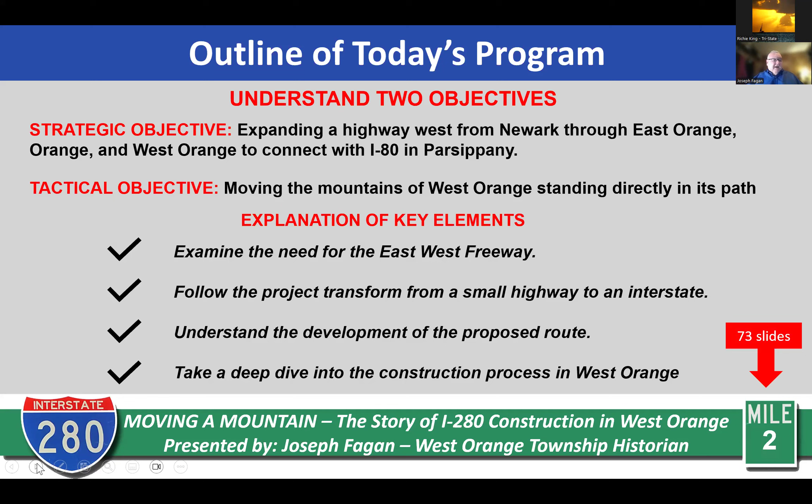So tonight I'd like to explore these key elements: examine the need for the east-west freeway, follow the project as it transformed from a very small highway to an actual interstate, understand what transpired in the development of the proposed route, and take a deep dive into the construction process in West Orange itself. There are 73 slides, which you can see in the lower right-hand corner. I have it marked like a mile marker, so you can see where we are in terms of progress.

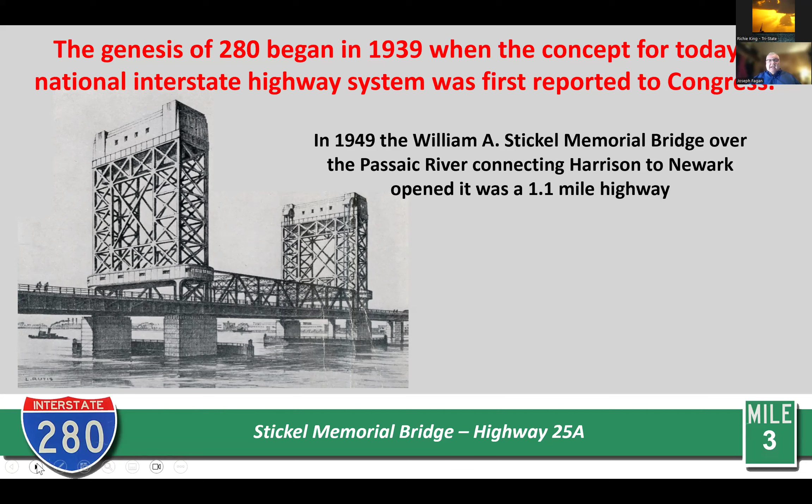The genesis of 280 - the concept for today's National Interstate Highway System - was actually first reported to Congress in 1939. Then in 1949, a landmark I'm sure you're all familiar with, the William A. Stickel Bridge, was built over the Passaic River connecting Harrison to Newark, and it opened as a 1.1 mile highway. It's hard to really think of 1.1 miles as a highway, but that's how it began. It was classified as New Jersey 25A. William A. Stickel, by the way, was an engineer, a county engineer for Essex County.

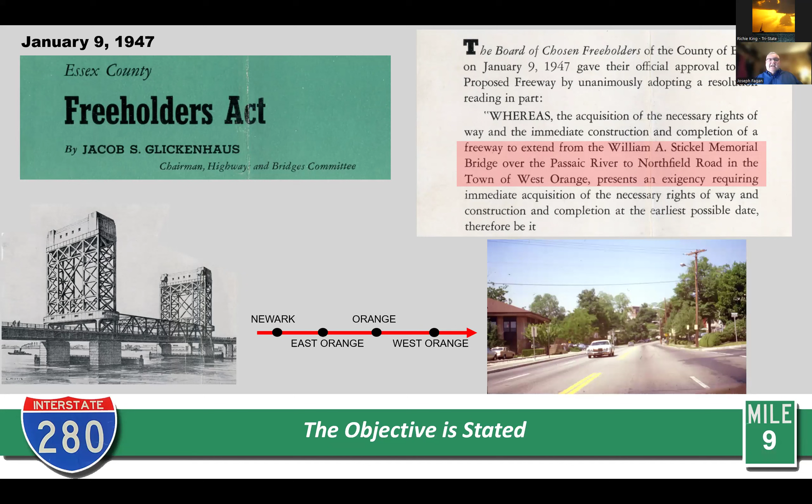So it was looking to go from Newark, East Orange, Orange, West Orange. That was the proposed route, and it was going to end at Northfield Road in West Orange. That's a picture of Northfield Road there on the right side.

It started as Highway 25A, as I had mentioned. Then in 1953, it was renamed New Jersey Route 58 under the old highway numbering system. And it eventually, in 1956, President Eisenhower provided funding to build an interstate highway system.

It might be worth mentioning that President Eisenhower, before he was president, was General Eisenhower, Supreme Commander during World War II. Eisenhower had brought home with him from Europe the concept of an interstate highway system because he saw how beneficial it could be in Germany. He saw how the Germans had built the Autobahn system, and Eisenhower felt it was important for us to have a similar system here in the United States.

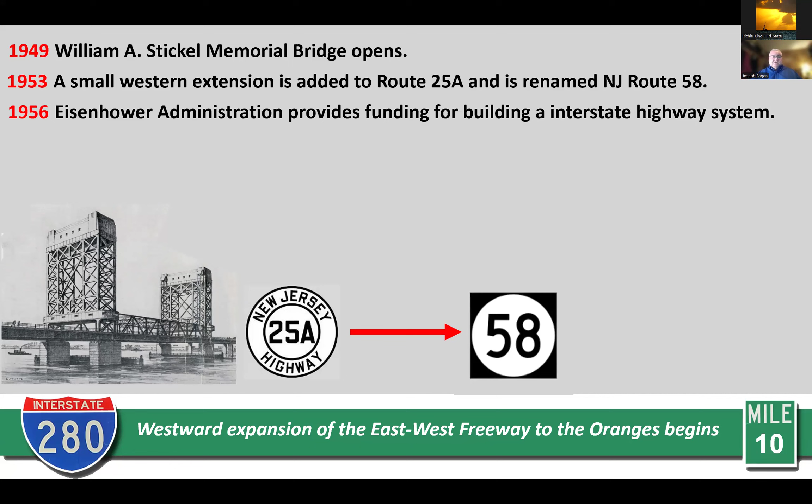In 1957, it officially received the designation of I-280, but there were no route designations as of yet. You could say 1957 is when 280 was born.

And of course, it was always interesting that it actually took you to Route 80. As a kid growing up, we always thought that was cool, because that's why it was named 280. When in reality, any connecting highway to a major highway, and there's plenty of examples around the country, is usually a 3-digit designation.

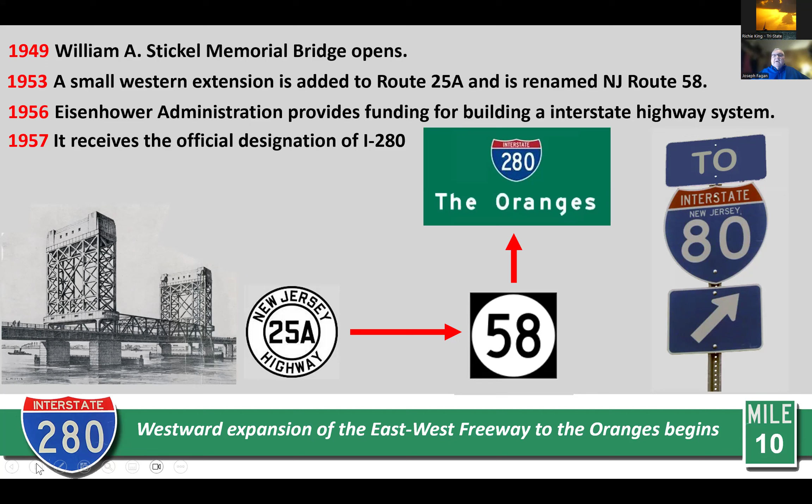It's not advancing here. Oh, I'm sorry. Bear with me a moment.

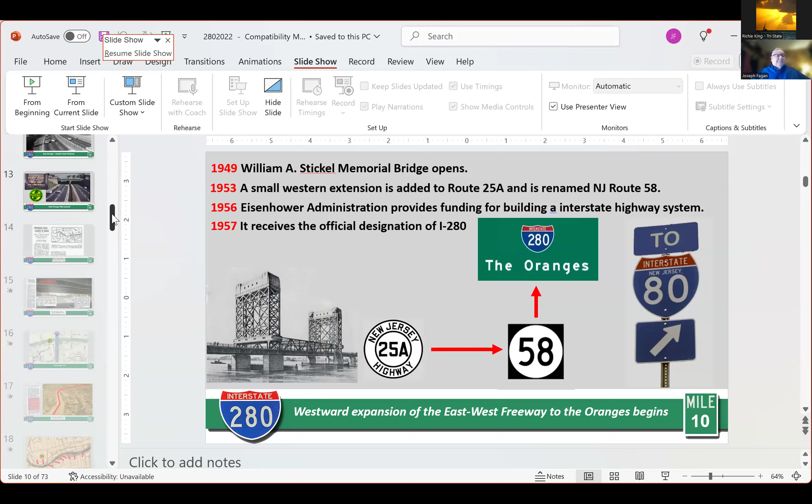So the biggest takeaway of these first obstacles was that a freeway will not be free, that there were going to be many costs associated with it. Of course, costs were anticipated, but the battle began as to where the highway would go, below grade or above grade.

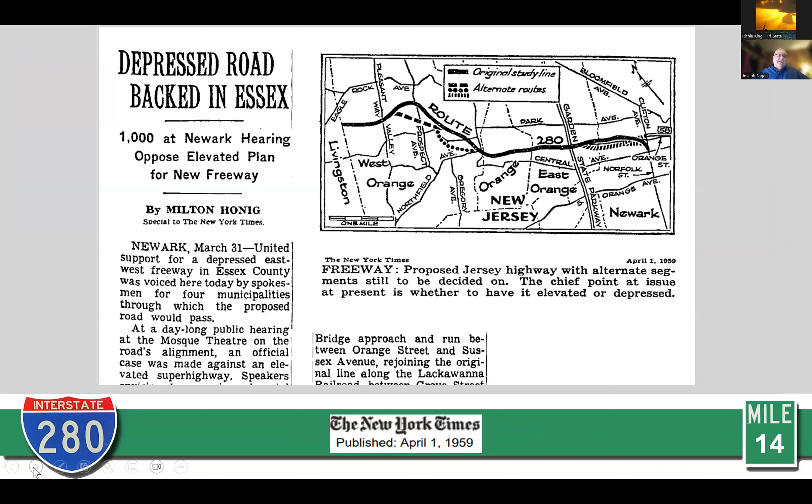Another article from the New York Times, 1959, talked about people turning out in opposition of an elevated plan for the new freeway. It was ultimately decided and reported in 1961 that the proposed east-west freeway would bisect Essex County, but it would pass under the Garden State Parkway. So the battle was kind of won for a depressed roadway. And it was only at that point a 7.3-mile long freeway, which received its designation for 280 in 1957.

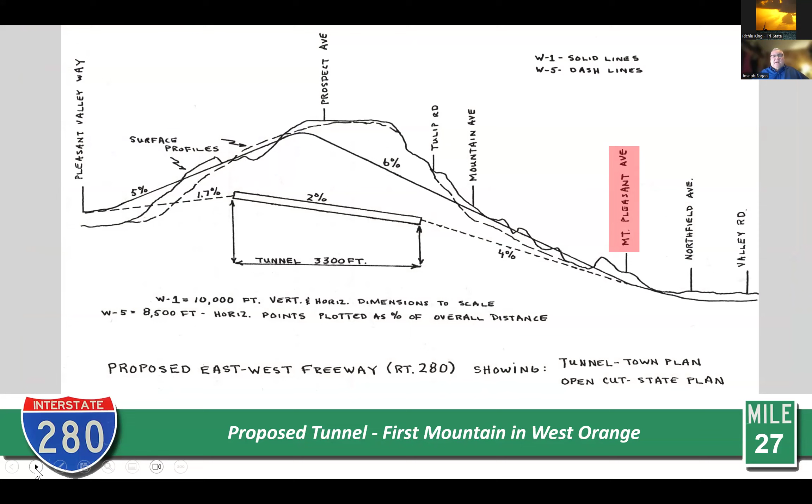This profile shows the 6% grade as opposed to -- that's Mount Pleasant Avenue, that's Pleasant Valley Way -- this is what West Orange Mayor Sheeran wanted. He wanted a tunnel through the mountain, and it would have only been a 2% grade, which would have been much safer. Mayor Sheeran was a veteran, a decorated veteran, I should note, of World War II.

Mayor Sheeran was actually very visionary in his concept for a tunnel through the mountain because he believed that West Orange could retain the land above the tunnel for taxable purposes, taxable ratables. He also believed the tunnel could be used as an emergency shelter if needed during the height of the Cold War. Of course, the tunnel concept was deemed too expensive, and the yellow line indicates the 6% grade, and that was how it was built.

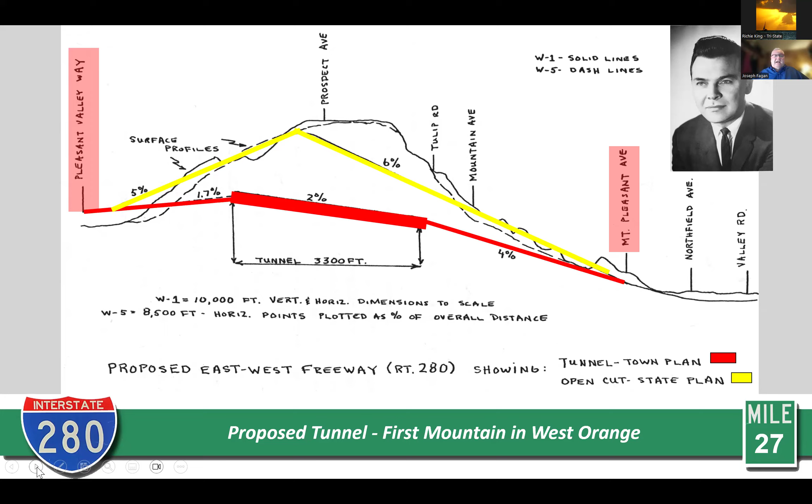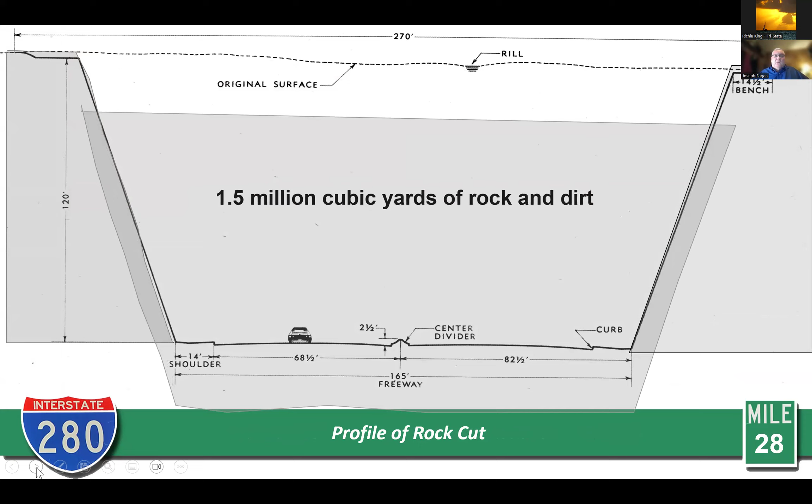This is a profile looking at the deep rock cut, and there was 1.5 million cubic yards of road, rock and dirt in the way, and that all had to come out. So that was one of the engineering feats that remained in front of the construction.

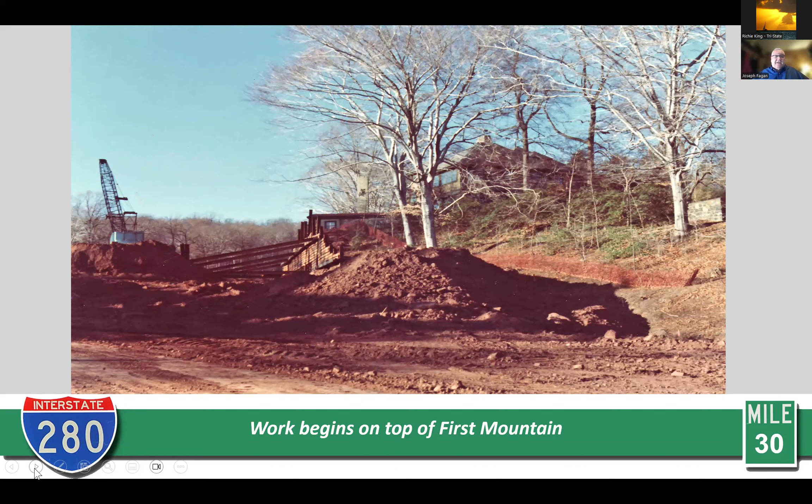When construction began on the top of the first mountain, they used -- well, first it was just digging by conventional means, just moving dirt around. This is, I believe, a house on Llewellyn Park that's now on top of the hill there. But it really wasn't so much affected by the construction.

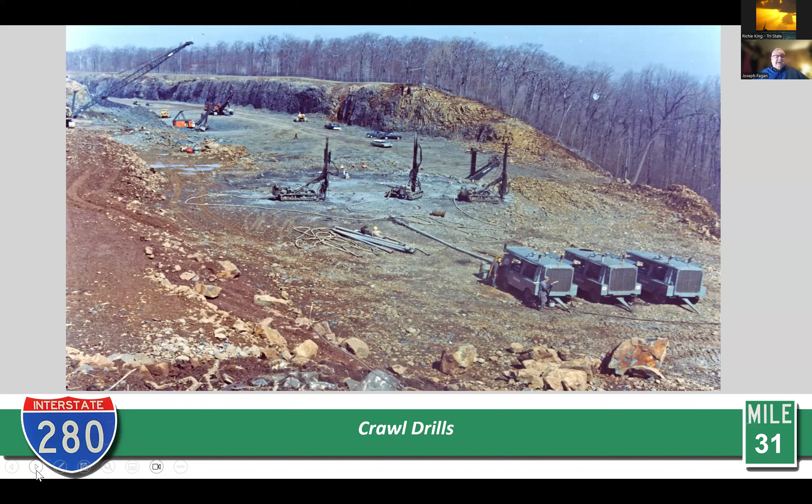But as construction progressed, the company used Ingersoll Rand, what was called crawl drills. These basically were drills that could be maneuvered into place. You can see the air compressors to the right side, and they were powered by the air compressors, and they would dig down.

There were 10 crawl drills, and they could produce 4,000 yards of rock a day with no delays. Now, of course, this was a sales pitch, but I'm sure there was some truth to that, and it helped keep on schedule.

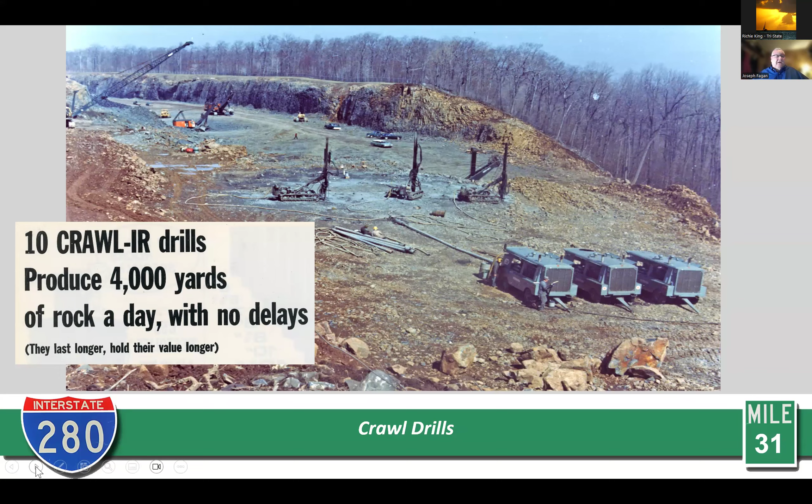Here you can see a picture of the crawl drills in action, and this was an ad that appeared in a trade journal from Ingersoll Rand. Of course, they used the 280 construction as a selling point for the crawl drills.

If you drive along 280 today -- don't take your eyes off the road, the road is dangerous enough -- but if you're a passenger in a vehicle, you can still see some of these marks in the rock. These were the result of the crawl drills drilling down into the rock to put explosives in there to remove the rock.

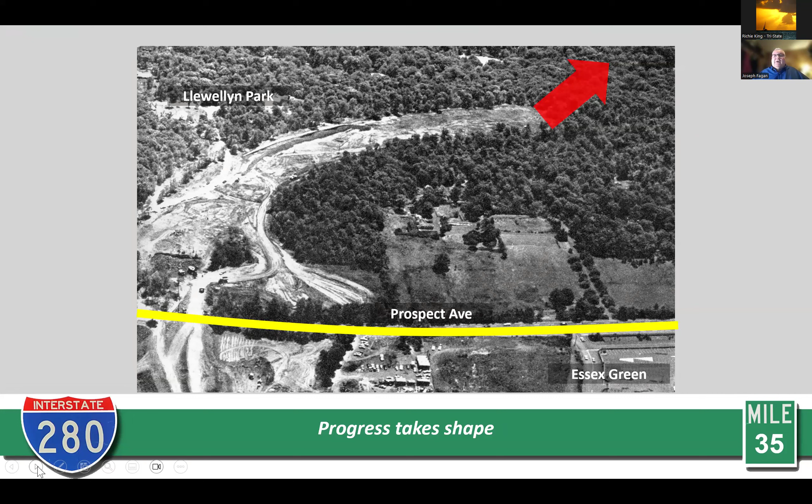Here you can see an aerial view of progress taking shape. Trees have been removed, the highway is starting to take form. This is Prospect Avenue in West Orange, so we're looking east. Essex Green, if you're familiar with the area, is in the lower right-hand corner. The red arrow indicates the direction it's going, towards Orange, East Orange, Newark.

This is on Prospect Avenue in West Orange. I actually remember this, traveling on Prospect Avenue as a young boy with my family and seeing all this construction and just wondering what the heck is going on.

One of the problems confronted by the engineers was in Morris County, there were low-lying areas, and they needed to build up the roadway bed.

Now, some problems arose from this method. A completion deadline in 1971 was fast approaching. They had many delays with funding, but they wanted to abide by the schedule of getting this done quickly. But trucks could only run on a limited basis over the neighborhood streets, and there were high maintenance costs. I believe frequent tire replacements were part of the problem with running these trucks.

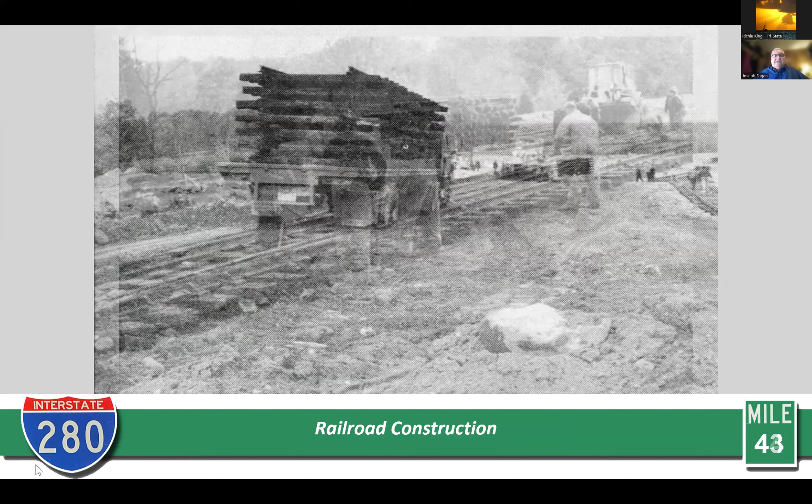So the construction of the railroad came very quickly. Here you can see, from the magazine article, the rail sections being brought to the site and being laid into position by workers.

These are just some random shots of the construction of the railroad. This shot here is looking west, near the Eisenhower Parkway interchange.

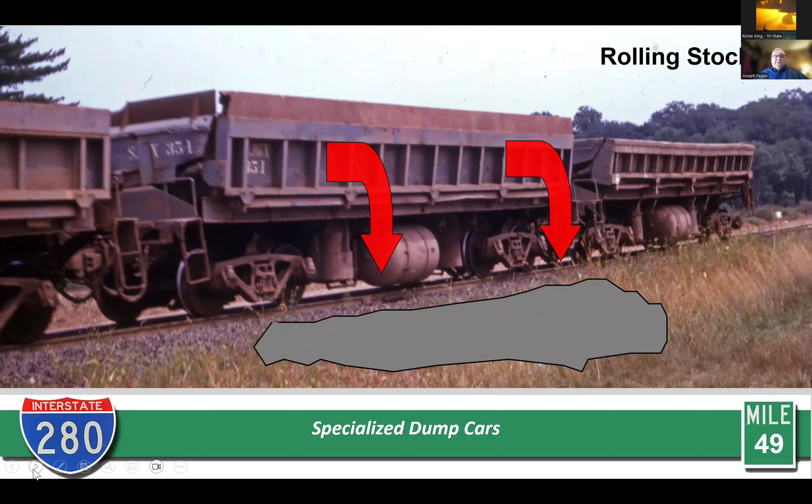The rail cars were specially designed rail cars where the load could be loaded in the top, and the side of the car would open. The door would swing open, and it could be dumped onto the ground. These were specialized dump cars, and in later years they got some more from Eagle-Picher. I believe this was a mine out west someplace where they got these cars on lease or purchased, and they reused them in the construction.

I also might point out that the trains were operated by S.J. Groves employees, not railroad engineers, and that also caused some fuss with the railroad because they wanted engineers, but S.J. Groves had nothing of that, and they used their own employees to operate.

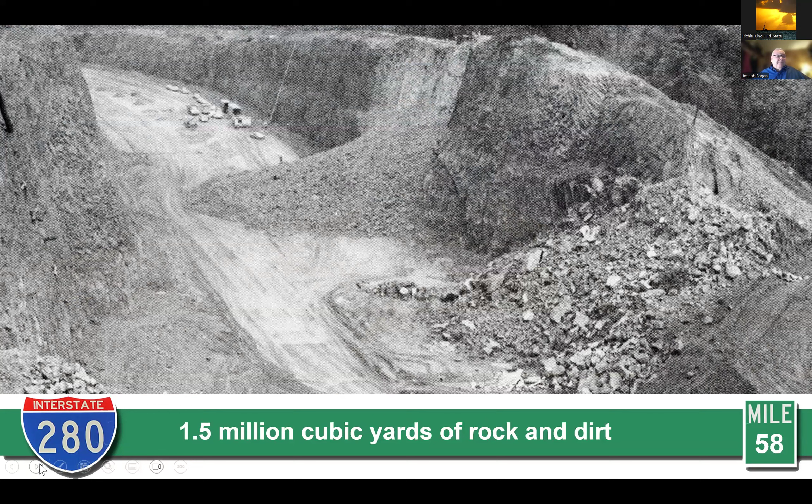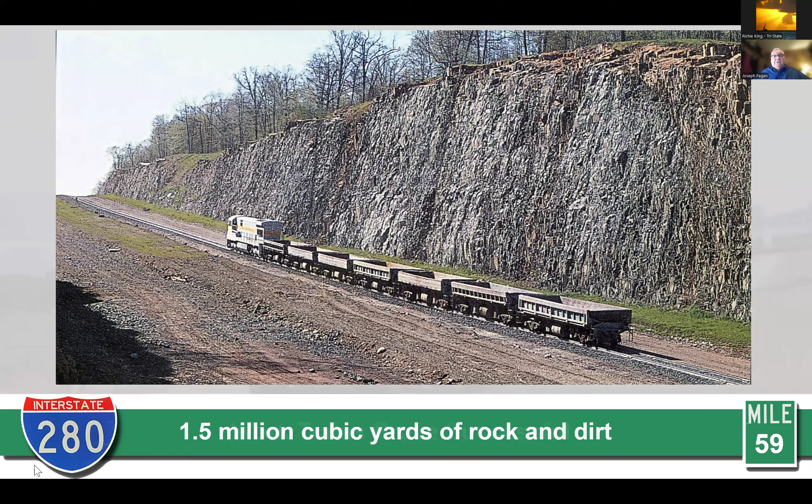This is the Laurel Avenue exit. You can see the overpass has been completed. And this is the Alco engine, which as I said was usually used to help the two General Electric units. It's one of my favorite pictures here—you can really see the highway starting to take shape, and the rock heading west towards Morris County.

This is just east of Prospect Avenue, a staging area. But looking east, you can see there's still a lot of work that needs to be done to get the highway down the mountain and through the Oranges.

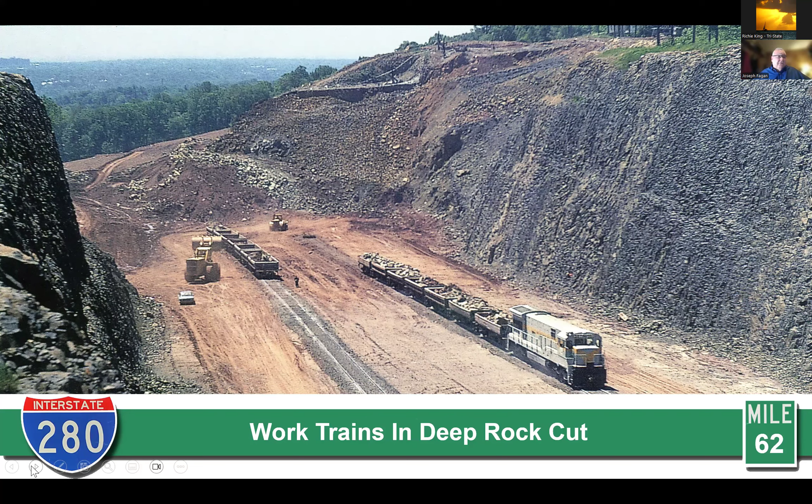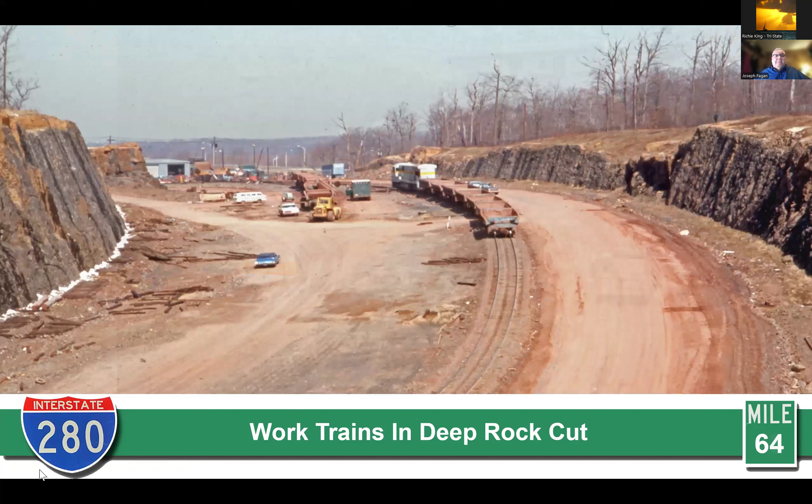This is a view of the Prospect Avenue overpass, where you get a better look at the special cars, the dump cars, of the train. Here's another picture in the Prospect Avenue area, as is this one.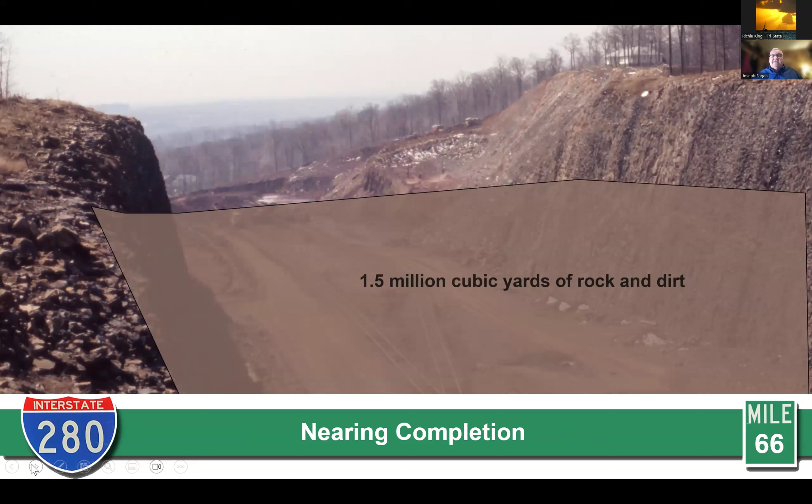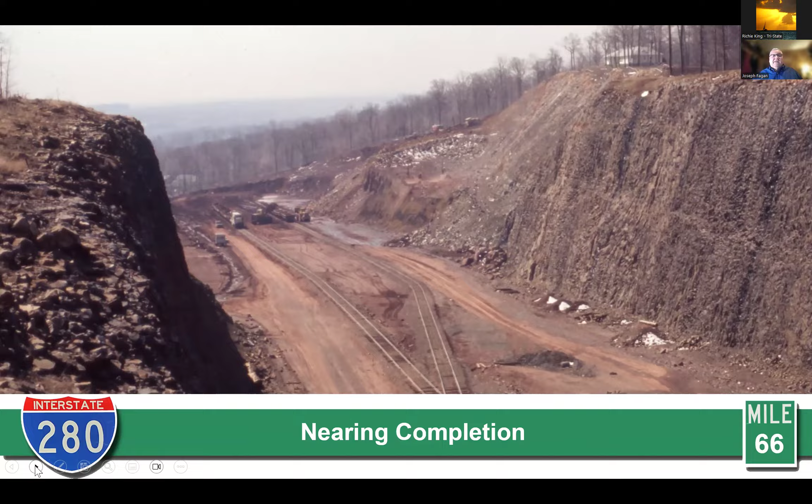As I mentioned, it was 1.5 million cubic yards of rock and dirt that had to come out of there, and just to make that disappear the way it did, it was all done by the temporary railroad. It started with trucks, but the trucks weren't going to work out for many reasons, so the railroad proved to be the most plausible, most reasonable means of getting it done.

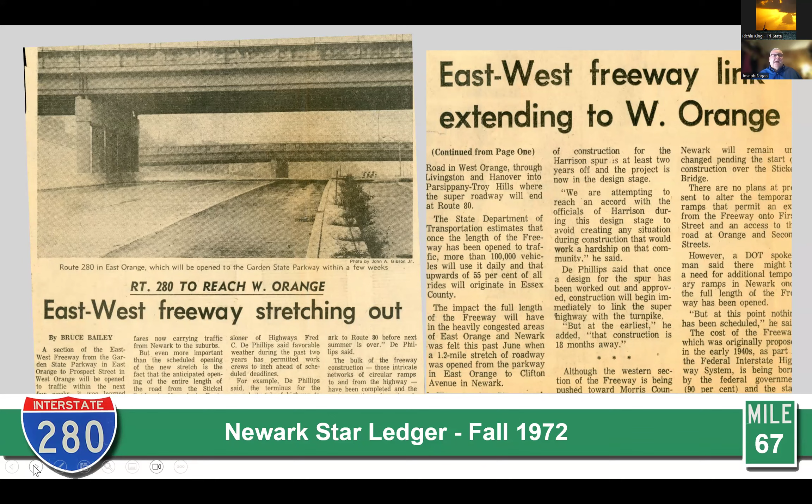By the fall of 1972, the Star Ledger reported that the East-West Freeway was under construction but actually nearly completed, though not yet open. Many people from West Orange, including myself, can tell you stories of sneaking onto the highway, riding their cars or bicycles on it, just getting on the highway. It wasn't open—it just remained there, ready for use but not open.

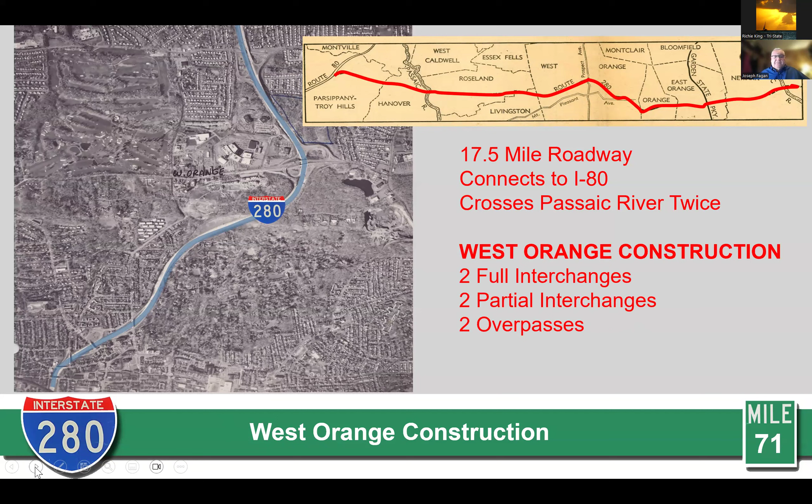You can add a little clarity to this photograph.

So I guess the 280 epilogue would be that it has changed the landscape forever. There are certainly benefits to interstate travel—we use 280 every day, I'm on the road every day, and I couldn't imagine life without it. Of course it's not without problems, no highway is. But having grown up in West Orange and witnessed the construction of 280, even today, all these years later, I drive across and think back to the time when we drove, or rode our bicycles, on the highway.

Interstate 280 opened on Friday, June 22nd, 1973, with a motorcade in West Orange. I believe that went from Pleasant Valley Way east to Mount Pleasant Avenue and turned around and came back, but the highway was officially open that day. It wasn't completed all the way to Kearny at that time. I'm not exactly sure when that happened, but it happened at some point after. It's always kind of been a work in progress.